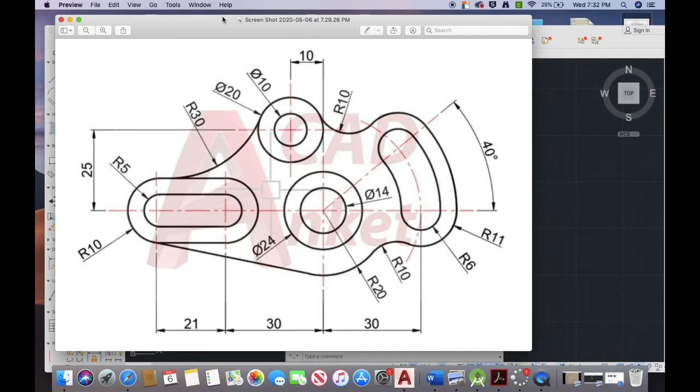So with all that said, we definitely want to keep this picture in mind. In fact, you should refer to it pretty often. It's in the written instructions. So you'll notice these two concentric circles here, that's where we're going to start. These lines, we're going to make all these lines, and near the end we'll fix them. You're going to see we'll make them a little too big, but that's okay. All these angles, you'll see how we make that. You may have some ideas already how to make such an angle. You should, we've done similar things.

Yeah, so let's get started. So the first thing we're going to do is come into our circle command, and we're going to do circle, center, radius. So let's do diameter, double check the drawing. Remember this symbol tells us it's the diameter, and when we see R, that's radius. So we can do circles with a 14 unit diameter and a 24 unit diameter.

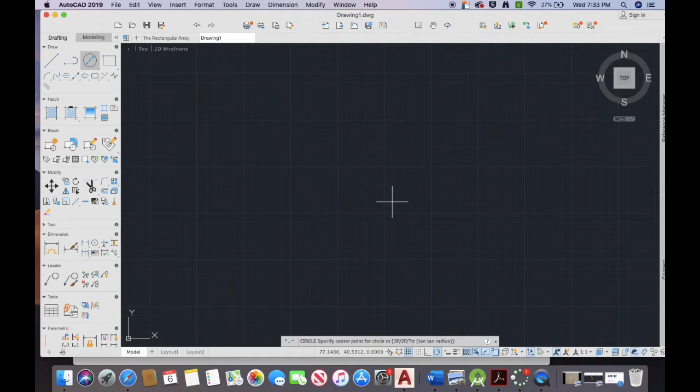So here we go, circle, center, diameter. We can start anywhere here, so some arbitrary point. Let me pull this up so we can see our command line. Start here, and we'll type in 14, press enter. The other one, pick the same center. And again, we definitely want our snaps on, and at points we'll need ortho mode on as well. In fact, I'll turn that on now.

So ortho mode is on and our snaps are on. I believe later on we'll have to turn ortho off, but we'll do that when we get there. So we're going to click the center point, and this one has a diameter of 24. Alright, so there's the beginning of a complex drawing.

Next thing we're going to do is head over to line, and this is where we want our ortho mode on. I'm going to come back again to the center of the circle. I have measurements in the handout for you, so I'll try to keep with those. We could change the size of these lines. You'll note at the end we're going to have to shorten them, so we could shorten them. But let's not. So we're going to click the center.

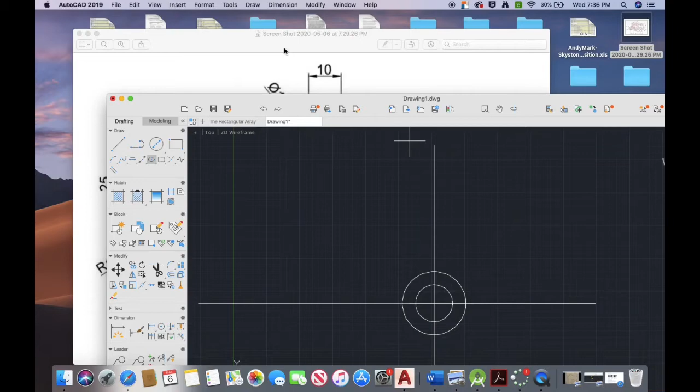Alright, and notice if we go back and take a look here, we're using these lines to really center all of our objects. So you'll see circles here, circles, right? So we're going to line up the center of all these objects here. We're also going to use this as kind of a snap in itself, as we're going to come up a measured distance here and move over. So we know the coordinates of this point. So anyway, let's continue on with our lines.

So the next thing we want to do, notice those lines are red. So we've done, hit escape. We've done a little bit of this in the past. I know a couple of people said they had a problem, so you're really going to want to pay attention here. We're going to go into line type.

So just type LT, press enter, and here where it says by layer, we're going to come in. I have a plus and minus sign, you may have load somewhere here. So I'm going to click the plus. You would click load. This should look familiar to all of you. We're going to, again, find center 2 and add it. We'll double click center 2. Good, good. We're going to save it.

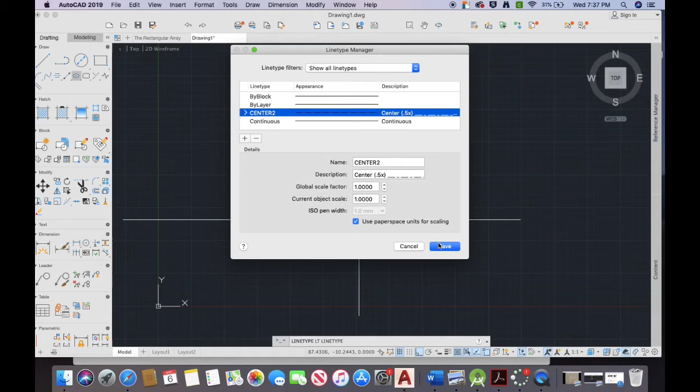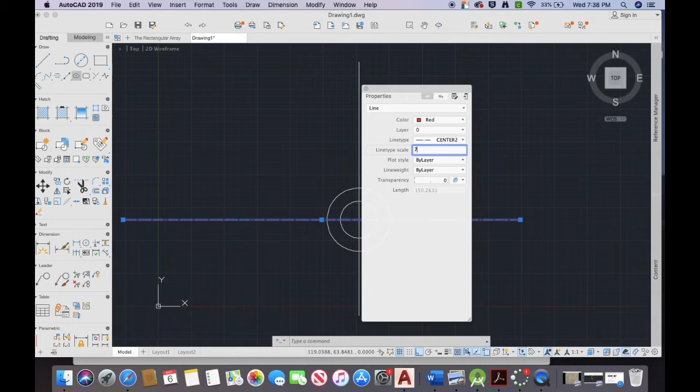Next, we'll click this line and type MO, that's for properties, press enter. Here we're going to change the color to red, as you saw in the drawing. We're going to change the line type to center 2 and the line scale to 7. Press enter. We can close out.

Right, and you'll notice that our line is now red and a broken line, much as it is in our guiding picture.

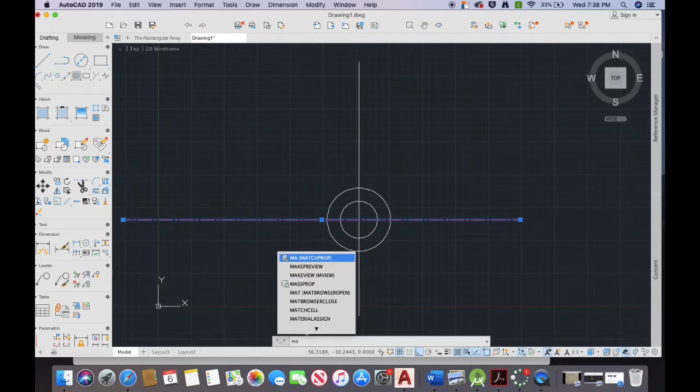So here, let's click on this line and type MA. This will let us match this line. So what do we want to match to it? This line here. So we click on it, notice it turns red. Alright, so we have our lines created.

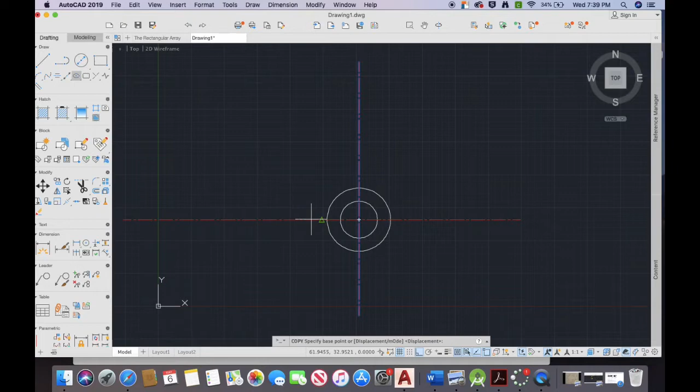Here's the vertical line. We can start with this one. We're going to click on it and then type CO for copy. So we want to specify the base point first. We'll just call this center point the base point. We're going to move the cursor left and type 30 to get our first copy. And again, move it left and type 51 to get our second copy.

And you take a look here. We'll come back here. You'll note here's the center, and that's 30 units over. And another 21 is this point. So far we've got our center lines being made.

All right, the next thing we want to do, press escape, come back, home, circle center radius, and we're going to click over here this time.

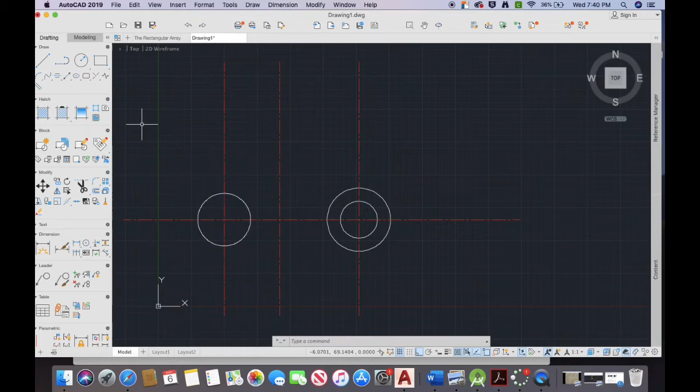So this circle is going to have a radius of 10. Press enter, and we're going to do the same thing. So click our circle, center radius again, come in, and this one will also have a radius of 10.

Alright, so again, just to take a quick look, you can see the outside line here is the radius of 10, so we're not starting with this inside. You'll see why, we learned about the offset tool a couple weeks ago. We're going to make use of that in just a few moments. So that's why radius 10, we're making this outer oval.

So the next thing, we're going to click on our line and connect the top center to the top center. Same thing at the bottom. These snaps are awesome.

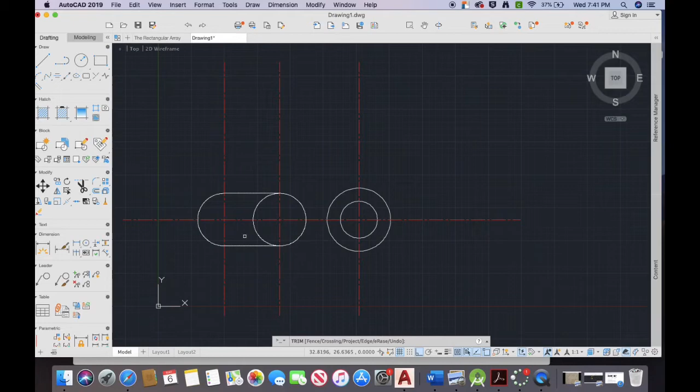All right, and now we'll come back with our, please remember, don't do like me, press escape, I keep forgetting. So we'll come back in and use our trusty trim tool. Please remember with the trim tool, for most of our uses, after you type it, press enter, it says select objects or select all, so you press enter to select all. That pretty much selects every object here. Then we're just going to trim this out. Alright, and we've created our oval.

We could do that using a polyline as well. If you want to try it, go for it. It's really not much more difficult, but you could use a polyline for that.

Alright, so next thing, here comes the offset tool. Just to take a look, you'll notice this has a radius of 10. This one has a radius of 5 on the inside. So when it asks for the offset, it's going to be 5 units for that reason. So we'll type O in the command line, offset pops up. Now it wants our offset distance, and we'll set it as 5.

You want to click, you can start anywhere. We can start here. Now, if I move my cursor outside, notice it's making it bigger, and that's not what we're looking to do, so we've got to move our cursor inside and click the next part of the oval, move inside. We'll just go right around here, move inside, and there's our double oval, if you will. All right.

So continuing on, we're going to come back and...

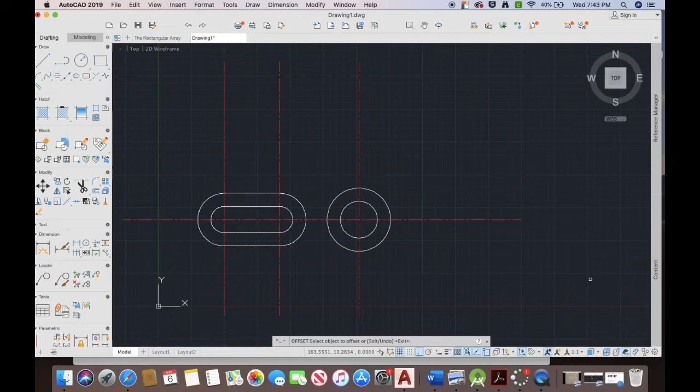So the last part of the video we were working on from the center here over. Now we're going to be working from the center to the right. So we're going to be making some of these lines next, and let's get started.

So first thing we want to do, we want to click on this vertical line and type CO for copy. We're going to move, pick our base point first, sorry. So click the center and move the cursor to the right and type 30, followed by enter, and press escape.

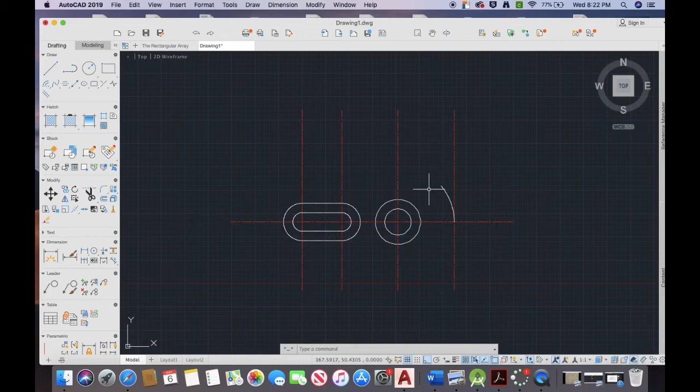So now we need an arc. We're going to come in here, select arc, center, start, angle. Our center is going to be the center of this circle. Our start point for the arc will be here. And now it wants an angle, so just move the cursor up a little bit, type 40, and press enter. All right, so there's the arc.

That's going to become this one here. All right, and now we want to draw a line. And we're going to connect the center of the circle to the top of the arc.

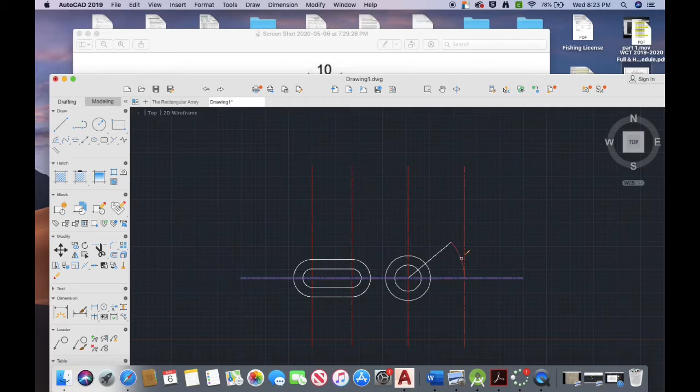Now we want to click this red vertical line. We're going to type MA again for the match, and come in here and match these two lines, followed by escape. We're going to go ahead and create another circle now.

So this one's going to be circle, center, radius. The center is going to be right here where 3 lines intersect, and the radius is 11.

So press enter, and we're going to create another circle, this time up at the center here. So again, it's the same command, circle, center, radius, right up here, and this one will have a radius of 11. Press enter.

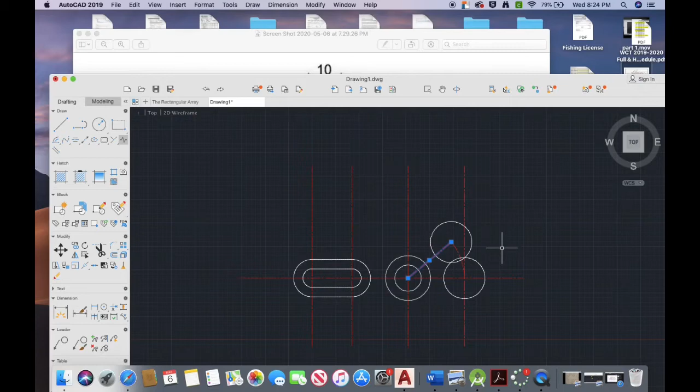Alright, so moving on, we want to extend this angled line here so it comes up to the circle. So we're going to type EX into the command line. We're going to select this. Sorry.

Alright, so we're going to extend. Let's start again. We're going to type EX, enter, and hit enter to select all objects. Now we select this angled line, and you can see it extends. Actually, it doesn't quite clip the circle, it intersects this red line, and that's okay. But we could have drawn this line shorter, and then it would intersect that circle. Keep that in mind, and if you want, you can fix that.

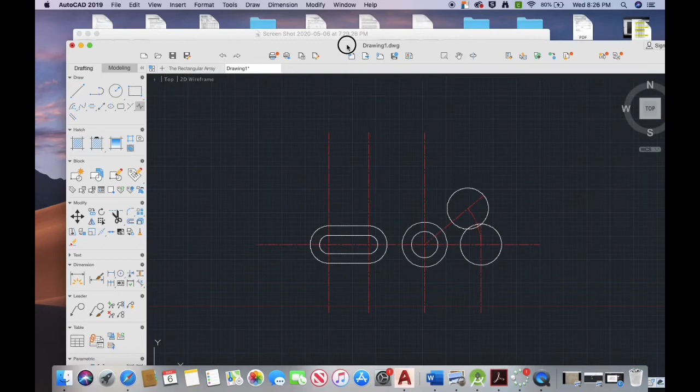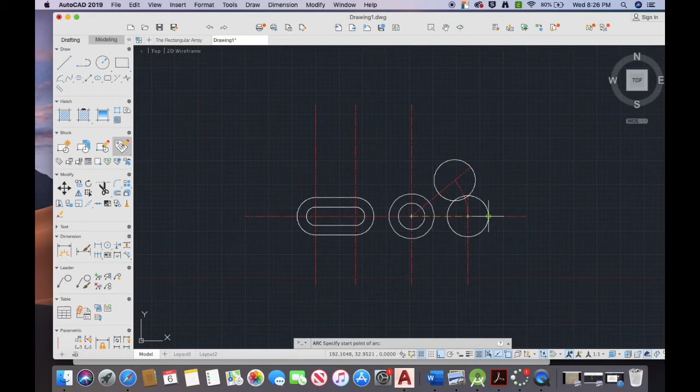So if you notice, we made this oval before. It was a nice straight line, so we were able to use a straight line. These will not be connected by a straight line. If we come back, you can see it's an arc. We drew the outer circle first, so we have to draw an arc. So that one's going to be arc, center, start, end this time. Center, start, end, right? And the center is going to be right here. Up here and connect. All right, so there's our arc.

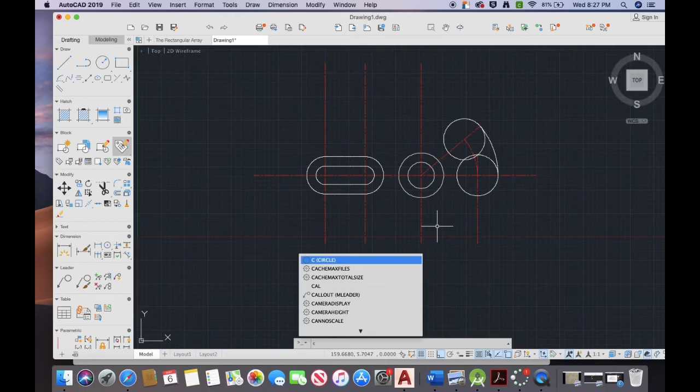All right, just getting my bearings. We have a couple lines to connect. So we're going to click this guy. No, sorry, type CO for copy. Now we'll click this guy, pretty much our original line. And we're going to move the cursor again. Sorry, center. All right, nothing wants to work, so let's try this one more time. We're going to copy, we're going to pick this line.

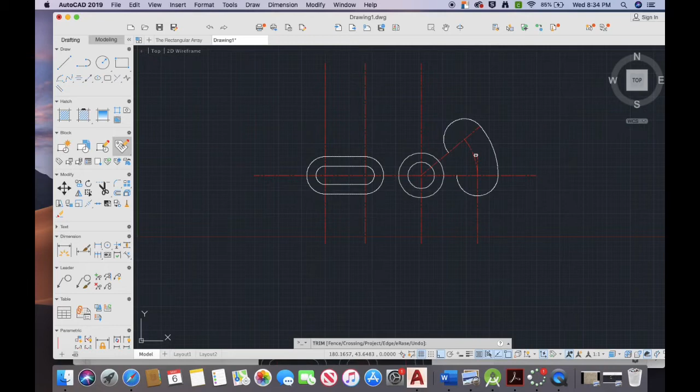Okay, we're going to keep working at this part here. So the next thing we want to do is type trim in our command line, press enter, and again press enter to select all objects. We're just going to start trimming these circles here. If it doesn't let us trim something, we can always use the erase tool. So erase, press enter, and we can come in and just erase these couple pieces. Press enter, and escape. We can zoom back out. So let's come back to our guiding drawing.

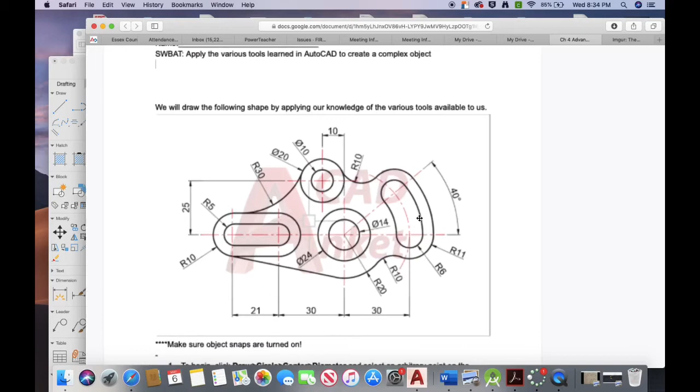All right, so here we're going to use the offset again. We have the radius of 11, which we've done, and now we need to create this inner oval that has a radius of 6. So again, we can do 11 minus 6, our offset is going to be 5. So we come back to our command line, we type O. It says specify offset distance, that's going to be 5. And again, just like before, we're going to click a part of the oval and move the cursor inside. Click the oval, move the cursor, click the oval, and move the cursor.

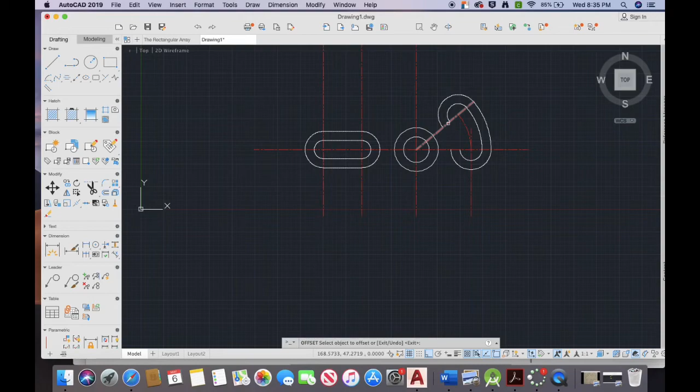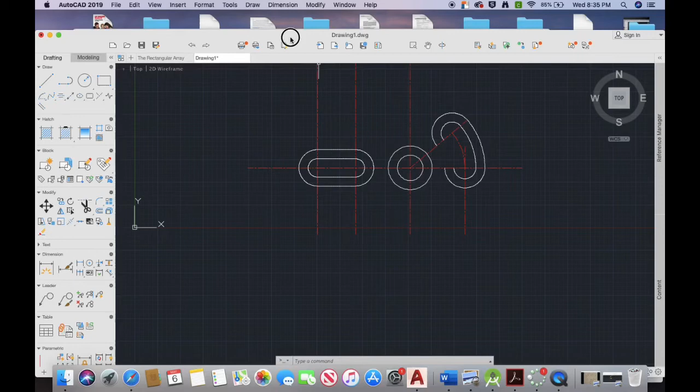All right, you'll notice in our drawing now that one oval is not complete. This one never gets closed. We'll be dealing with that shortly, but one of the things we have to do soon is close that oval. So again, that's going to be with an arc. We'll come down over to draw, center, start, end. Again, our center will be here, our start, and end. All right, and we've closed that oval.

So next, we want to copy a couple of these lines. So let's click, I'll type copy, click this horizontal line, press enter. Our base point is going to be the center. Move our cursor upwards and type 25. Press escape. We're going to copy one more time, so type copy, enter. We want to select this vertical line this time. The base point again will be, press enter. Now once the base point, we're going to move the cursor left and type 10.

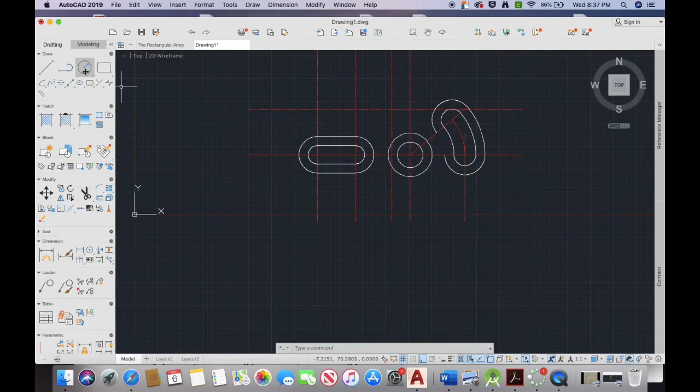So now we've created this line, and what we're really concerned with is where they intersect here. So at this point, we're going to draw two circles using the circle center diameter. Right here, our first circle will have a diameter of 10. Click the same tool, and our second circle will have a diameter of 20. Okay, so we're getting closer here.

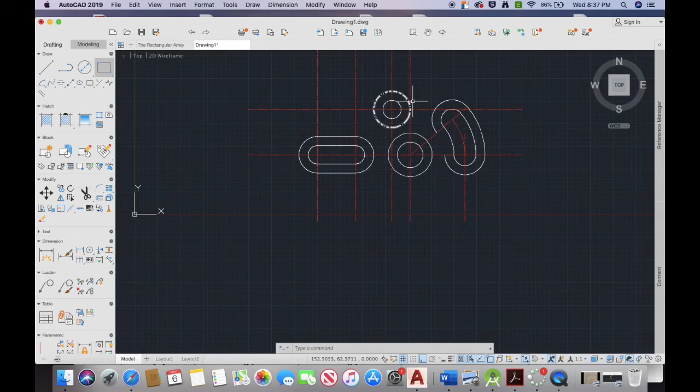Now we need to connect this circle and this unfinished oval, and we have a way to do that. We're going to use the fillet tool. So type F, press enter. Here, you guys are going to select radius, I'll type it in. Our radius is going to be 10, so you can type 10, press enter. And we're going to select circle A over here, select the second object, and be right here. And voila, we have a fillet. It's kind of a new or novel use of the fillet tool for us. But again, sometimes we have to think outside the box, think what tools do we have available to us, and really all we've done is rounded off an edge.

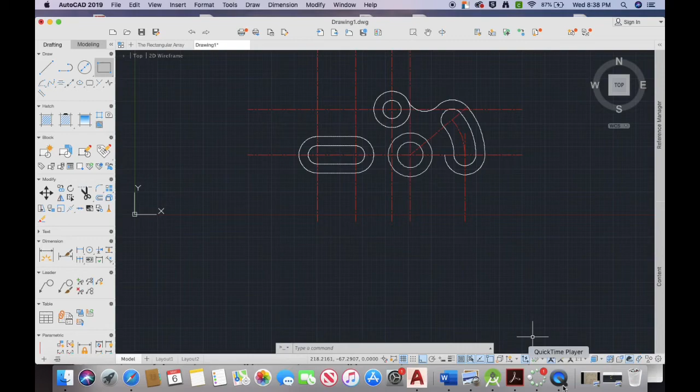This next part, we're going to connect this circle with this oval. We're going to do that in a way we've used in the past. So we're going to click circle, tan radius, identify spot tangent to this circle, spot tangent here, and the radius is going to be 30 units.

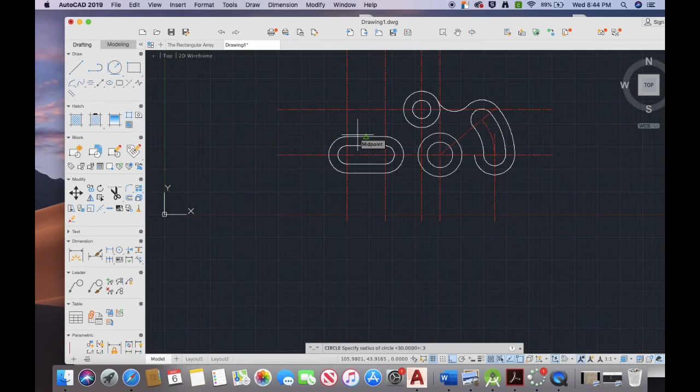There we go. Back to our trim tool, so type trim, press enter again. We're going to trim out the parts we don't need, and there we go. We've connected those two. I'm going to press escape.

The next thing we want to do, we're going to jump back over to this side with another circle. We're going to circle, center radius. Center is going to be at the center here, and the radius will be 20 this time, so it'll be a little bit larger circle, and that starts to bring together the outside down here. We'll just have over here to connect. We'll do that in a minute.

So again, similar to what we did here, we're going to use the fillet tool. Type F, click radius, I'll type it. The radius this time, again, just like last time, is 10. And we'll pick these two spots. There, we've closed that.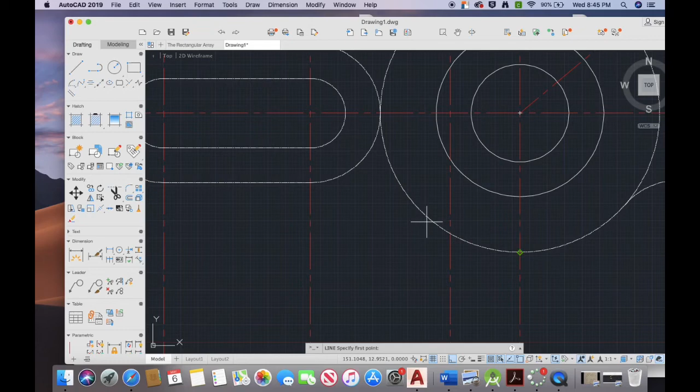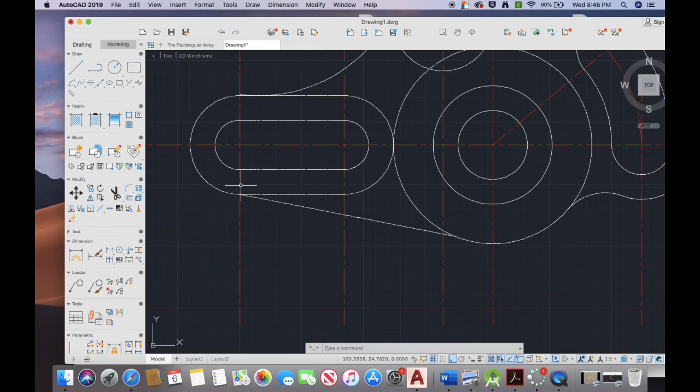So now we want to come back and connect the last outside piece. This one takes a little patience. So we can click here and then come down this way. But you'll notice what happened was there's a line inside the circle, so we'll just come back, press escape. So I made a second line, click on the one that's inside the circle, delete, and there we go, nice clean line, tangent.

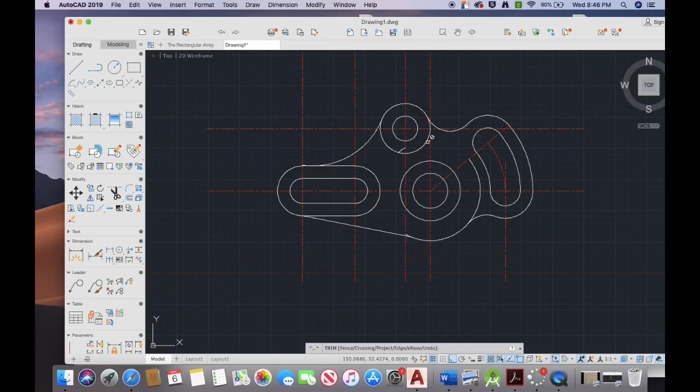Right, and now we're going to come in and use the trim tool, type trim, press enter, enter again, start getting rid of all the pieces that we don't need. Again, if something doesn't get removed with the trim tool, we're going to come back and just use erase. So I'll zoom in, let's not leave anything too sloppy.

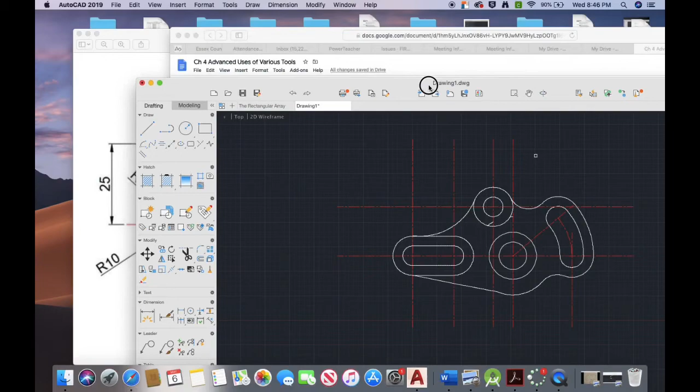You can look at the standard drawing we had at the beginning to get an idea what lines, if any, we don't need. So if there's any extra red lines, which I don't think there are, we can trim those. We also have the option to come in. We definitely don't need this length, so just click on them and minimize them.

Alright, so I just use the stretch tool, just bring them back in. As I said in the beginning, we were drawing them too long, but that's okay, they were just a guide. Now at the end we have kind of a nice professional look.

Come in, just click each one, shorten it down. Alright, some of them don't want to cooperate. This one really doesn't like me. I'm not sure what happened. Oh, that's what happened. Maybe, no.

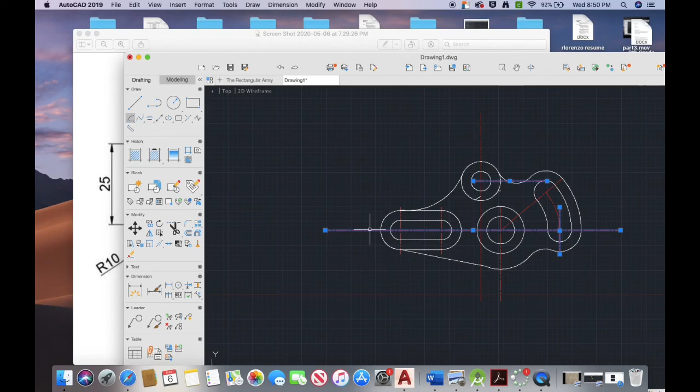Alright, you can get them to look like the stock drawing I gave you at the beginning. Mine are not going. And what I would probably do is copy them, paste it, delete the old, keep the new, and that would probably work.

I think we've created one heck of a drawing. You've used a lot of tools. You've seen a lot of stuff. I would love to get you guys to do one of these on your own. I don't think that's too far off.

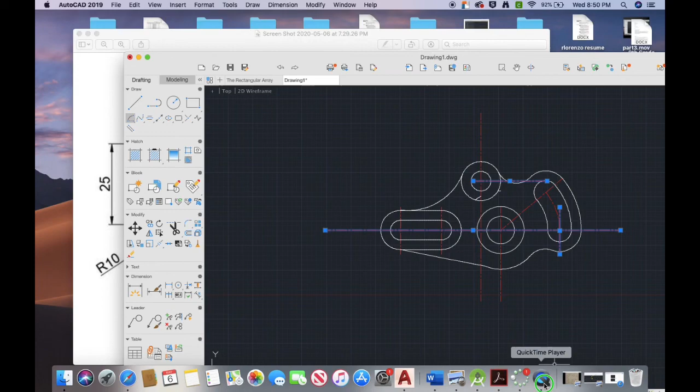Alright, so I finished trimming up some of these red lines, and you'll notice again, anything that shouldn't be here, we can type erase, press enter. Let's come in here, click, get rid of that, press enter.

All right, I know this one has been a little bit long. It is a performance task, so you follow along, you get a great grade, and hopefully you start to think about how can I use this myself, how can I start to really make some new and wild drawings?

The other thing is, at some point I'm going to give you a drawing like this and not give you the instructions, and that'll be your assessment. So you should just get used to this.

Get used to using lines like this red line to line up, right? Like we used it here to go up 25 and over 10, how we use these lines. So just get used to that. Make it a ritual to start seeing any object, even in your own home, as how could you make that object with a bunch of circles and maybe use fillets, etc., trim, to get the final object.